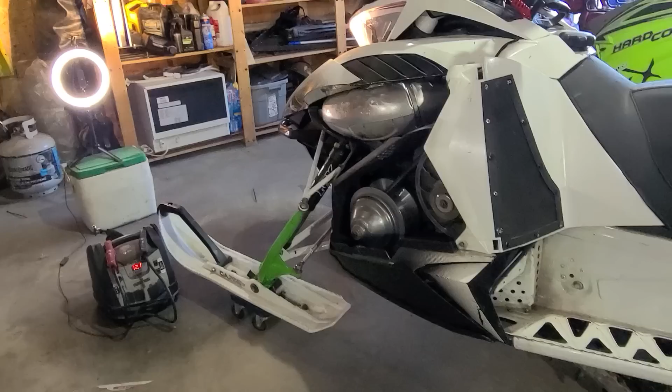We're back in the shop today talking about my M8's clutch. Do you guys remember this clutch? What about this clutch? And what about this clutch? Ooh, shiny new. Before we talk about this one, let's go back and remember fondly all the clutches

I've blown in the last 2 years. It turns out that these Arctic Cat clutches, the stock clutches on 2015 and down M's, they suck.

I could have went a couple of different ways here, but I decided to get something completely aftermarket. This is a Powerbloc clutch. You can get these for Doos and I think Polaris as well, but we are going to be installing this one on the white M8 behind me.

Yes, believe it or not, I'm still putting work into that thing. Everyone's like, Matt, go and buy a new sled. Matt can't buy a new sled. Matt needed to buy a house last year, so there's no room in the budget for a new sled, but there is room in the budget still for clutches. This better be the last clutch that I ever have to put in this thing, I swear.

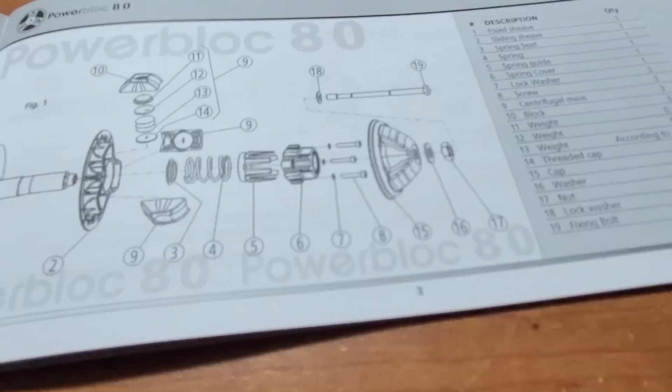I think I gotta look at this again. I hope I'm right in saying this. I think the first inspection said 1,500 kilometers or something like that. Oh my God, it says 5,000 kilometers. I don't usually get 5,000 kilometers to a clutch if I service it or not. Not on this M8 behind me.

I know a lot of people have been saying that the secondary is what falls apart on them. I've been through 3 primaries on this white M8 and I have never even had anything go wrong with the secondary. The bolt backed out one time if you count, but that's not really the secondary's problem.

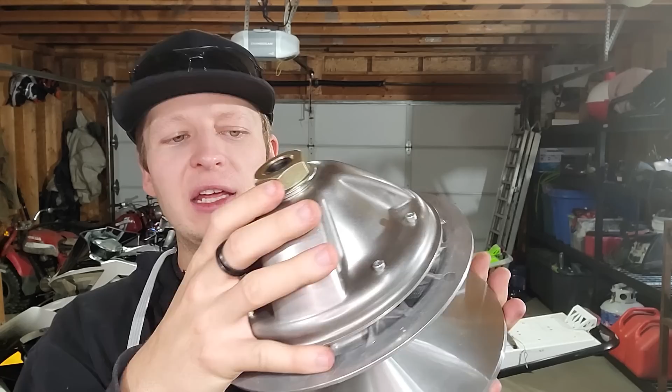But for the price, I could get one of these clutches from CVTech and it came completely calibrated. It comes with the spring, the weights. Actually, they give you extra weights, but everything in here is already installed. I'm not gonna open it up and show you what's going on inside because I don't have the right compressor here. So we will just be throwing it on and going over the instructions and what they give you in the kit.

And this should be the last clutch that this white M8 ever needs. I haven't seen a lot of people running this clutch. I saw a couple guys on Doos running them. It's supposed to free up some power, supposed to be a smoother takeoff. And for a fully calibrated clutch for the price, I think it better be worth it. It can't be any worse than these pieces of junk over here. I just want to freaking throw these out.

So let's go ahead and install this clutch. We will check out its alignment and all of that. Obviously there's no snow on the ground yet, but we are going to need to do a little bit of testing before we bring this white M8 to the mountains, because I know I said I was doing a bunch of work on it last year. Well, now it's getting all that work done over the next few weeks here. So you will see this white sled behind me change quite a bit in the next week or two. So let's get started on this.

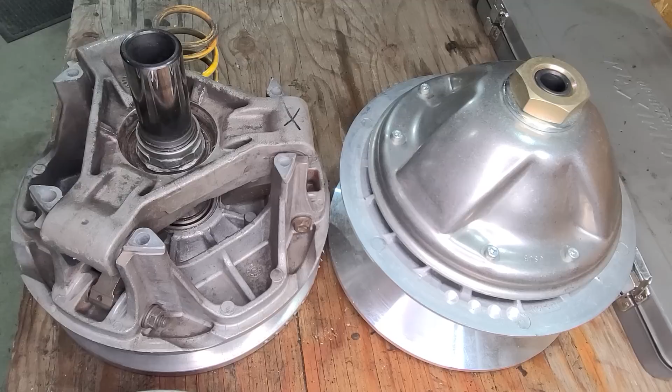On the left here, we have our classic Arctic Drive clutch, the one that I have been through multiple times before. They are actually built quite a bit differently. What tends to fail on these—actually I shouldn't even say what tends to fail, because I've had spiders crack, I've seen sheaves break.

That's not a very common one, but I have seen it. I've seen the spiders crack right here - this is the spider, this 3-pronged unit here. I've seen them crack. Actually that's how my first clutch went, a spider broke. But on this one, the dogs actually wore into the roller, and again this was the spider's fault, because these rollers on these clutches specifically, you can't rebuild them.

They're not from Arctic anyway. There are aftermarket kits you can get. It's kind of a pain to do and it's a little bit of a questionable repair, but you can see that this weight, or dog, depending on what you want to call it, gets worn down and seizes up and locks in there, and that's how these clutches go out.

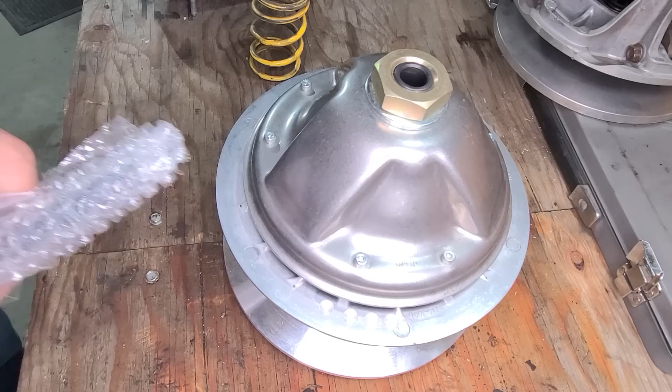So they actually give you a couple things here. This is going to be our new clutch bolt, this is just a lock washer, and these are actually weights. So if I wanted to recalibrate the clutch, these are the shim weights I would use. There's no dogs in it - fly weights, dogs, whatever you want to call them, there's lots of different names - the parts that can often lead to failure in that other clutch over there.

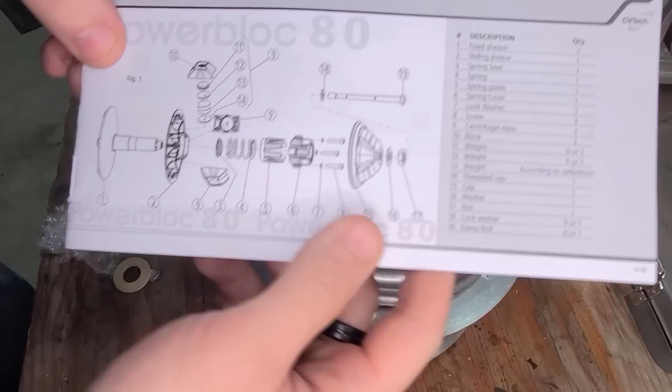But this clutch works actually very differently, even though it's a centrifugal clutch. I'm not going to take it apart, but I will go through the diagram. This clutch actually came pre-calibrated from CV Tech for my unit in particular. Let's go over the diagram here - you can see that though it's a similar build, similar shape, still a centrifugal clutch, it doesn't use fly weights.

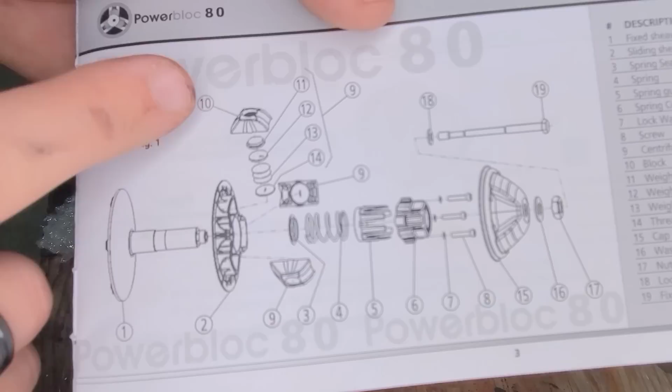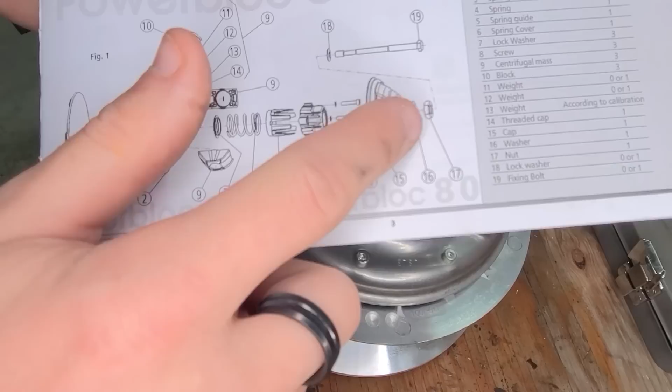These here are actually the weights, number 13. You can also see there's no spider in the clutch. There's a spring cover, spring guide, spring, and various other parts - sheave, movable sheave, fixed sheave, cover. I can go through every little part, but it doesn't really matter. There's no spider in it, so that's actually knocking out the failure part entirely.

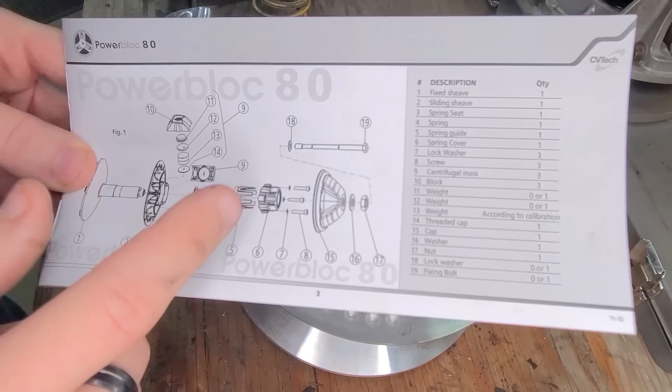And I did check, and it's 5,000 kilometers for the first service on this clutch, before the first inspection. I'm not going to go that long, but we will be taking this clutch apart fully, probably about halfway through the season. We're going to inspect it and we'll compare it.

Before we go ahead and decide to put our new CV Tech clutch on, we have our old clutch off already. We're going to take that ring weight off. A lot of people are going to disagree, they say you don't need it - I'm going to use it. And I've already hit all those bolts with a bunch of heat, and that will make them come out because they got a ton of Loctite on them.

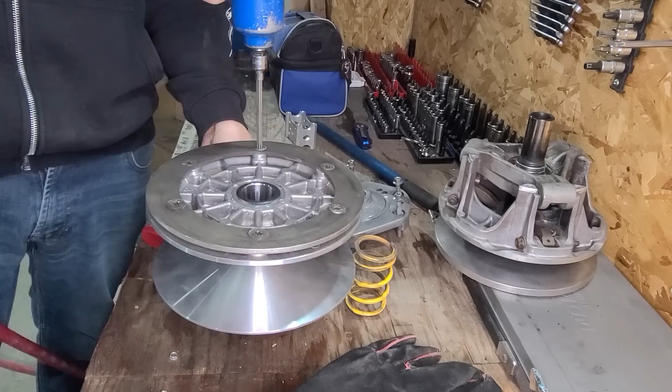Here's our clutch, here's our machine. There isn't really a whole lot to do here. We will be checking alignment, but this clutch comes completely calibrated, so really all we need to do...

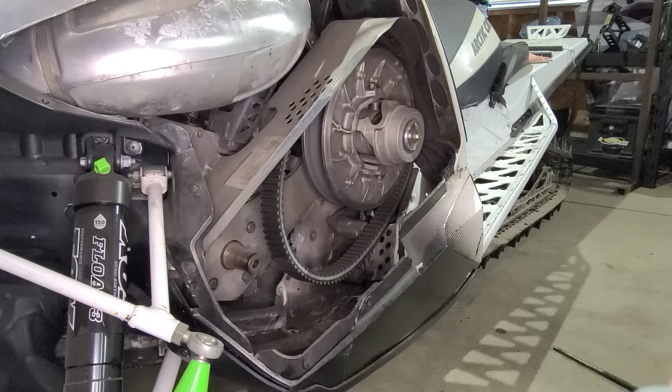And it's actually good to note that this is the stock clutch puller, the one we use on all the other Arctic Cat clutches, and it is fully compatible with this clutch. New bolt that comes with the kit. We're also going to make sure the lock washer is going on the proper way, and we're just going to tighten it up to factory specifications, using this little impact to save me a little time.

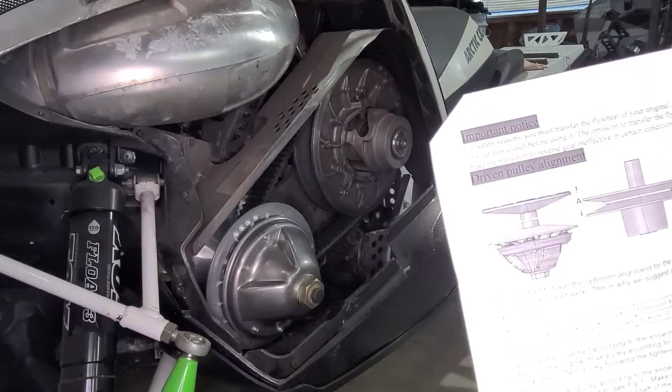I was also going to show the alignment process, but it occurred to me you're not gonna see what I'm doing, so here's a nice diagram. Pretty easy to do - just take a straight edge between the clutches, and then you're gonna want to measure the distance between the straight edge and the inside of the fixed sheave.

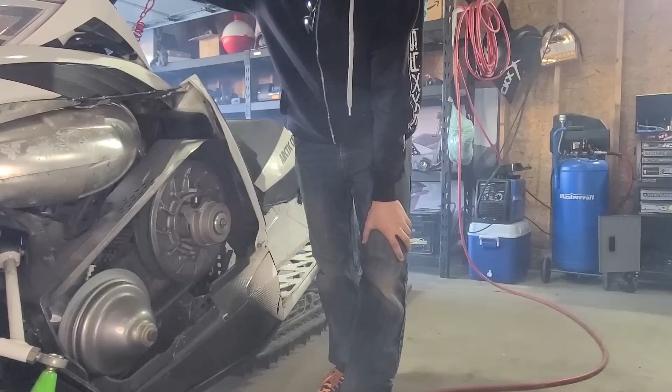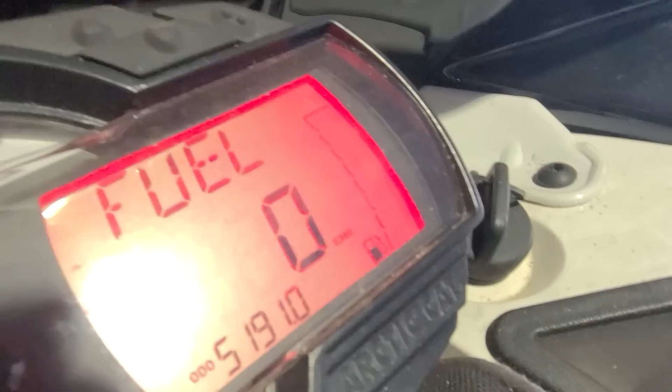Almost 5,200 kilometers on the old girl, and what? She's still running so good. We should do a compression test on that thing just for fun.

Stay tuned because there's some stuff for this coming up - the stuff that I promised I would do last year, I'm gonna be doing this year. It involves a tunnel and I haven't quite decided how I'm going to do it yet.

All right, we're installed. We're gonna have to go and test it out before we can really take it to the mountains. I want to make sure that everything I'm gonna be doing to this sled over the next few weeks is going to be solid. You guys remember that 2017 M8000 that I built, that Mountain Cat? Well, we're gonna have a similar thing happen to this.